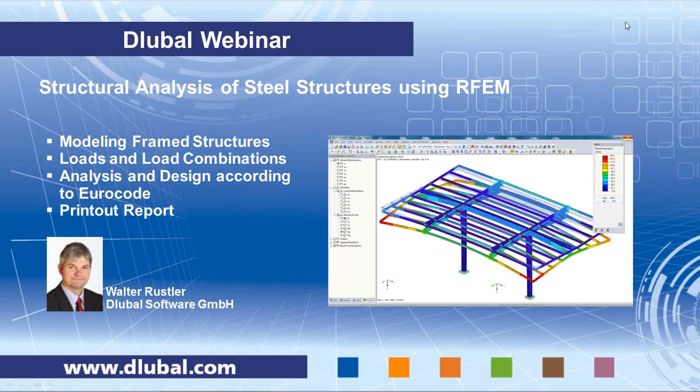Before we start with the live demonstration, I would like to point out the workflow inside RFEM and RF Steel EC3. These are the only modules we will take a look at today. So if you're looking for a Eurocode solution, those two programs are the ones that you need.

When designing according to a certain code, all the design parameters must be in alignment with the codes. It starts with specific materials, with specific parameters, with specific loads according to the code, with specific combinations to that code. Also, cross-section values can vary from code to code. And at the end, the code itself has several different design parameters.

Usually there are several options that you can use, and in case of the Eurocode, we have national annexes we have to take a look at. At the end, it makes your design flexible, and the goal is to have an economic and safe design. So it's vital to have access to all those variable parameters.

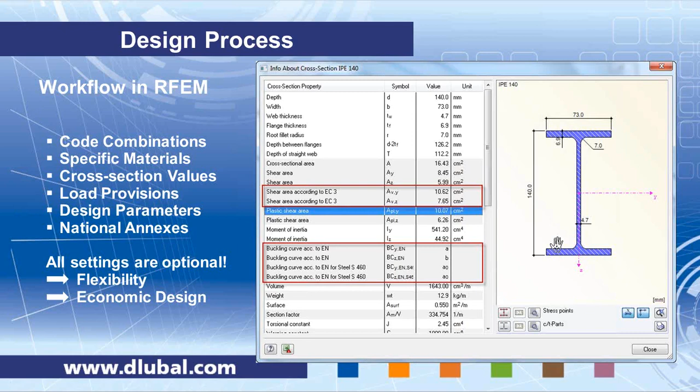When we talk about the cross-section, there are also special parameters in the cross-section library, for example, in case of Eurocode, shear area according to Eurocode, or buckling curves according to Eurocode. When choosing the design module for Eurocode, it will automatically use those parameters. Same is valid for other design codes that we are using.

When we talk about loading, it's clear that different codes and different provisions have different loading patterns and different wind and snow loads, for example. We have powerful generators inside RFEM for those types of loads.

In the design module itself, there are many options that we can set up how we do the design, which provisions we will use or not use. We also will take a look at those settings later. And in the case of Eurocode, there is a wide range of national parameters that are different from country to country.

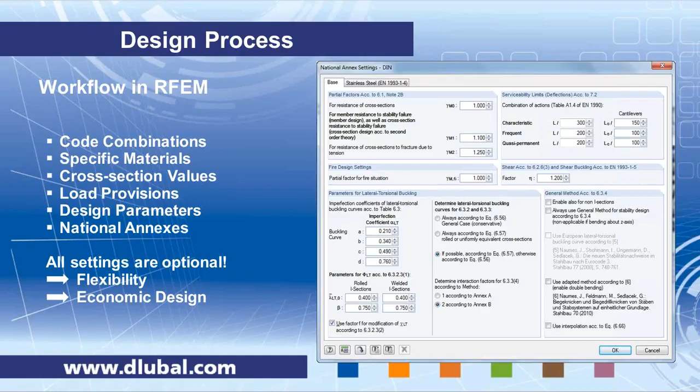The goal is really to have an economic and safe design, and we think it is very important that you can change those parameters and are flexible in the design process, because then you get really the best result and it makes your design very flexible and safe.

When we take a look at RF Steel EC3 in detail, it does a cross-section classification, so you can handle compact and slender cross-sections as well. And you can do an ultimate limit state design. You can check for your deflections and do a serviceability limit state design. You have a very powerful option to check against stability for buckling and lateral torsional buckling.

Additionally, you can do fire resistant design, and you can also use stainless steel in your design process.

Some special things about RF Steel EC3 are that we can, for example, choose between a member design and a set of member design. When we model a complex building or some structure with lateral intermediate supports, typically one part that would be built or constructed as one physical member is modeled as several analytical members. So one unity disintegrates into several different parts.

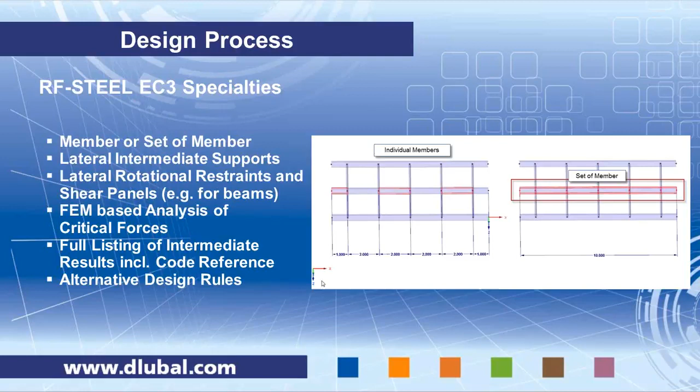When we think about buckling lengths, slenderness, loading, and also horizontal supports, it's clear that the length of a member is an important parameter for critical loads and critical moments, for example.

We also can handle lateral intermediate supports in a very simple way. You don't have to divide members when you want to put a lateral support, for example, with a nodal support there. You can just assign the distance of the lateral intermediate supports in the design module, and when we talk about critical loads, effective lengths, the software will take care of it, and it knows that there are those supports.

A very important feature is the lateral rotational restraints and shear panels. For example, if you have a moment frame for a steel hall and you can take into account the diaphragm that is stabilizing the I-beam against rotation, you can reach much higher critical bending moments, and therefore you get higher critical values and a better design ratio for your stability design. This is vital in those cases. If you don't have this, the chances that you have to use a larger cross-section are very high.

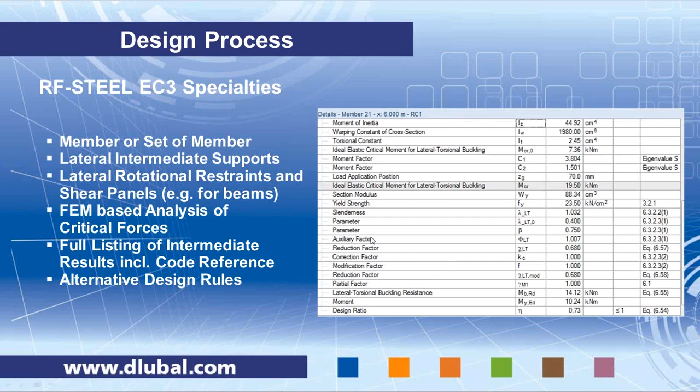Inside RF Steel EC3, we already have built in some newer research results that may be used in the next edition of the Eurocode. There are some limitations in the general method of EC3, and for example, you cannot use this general method for double bending, which is quite often needed during the design process. We have already included those provisions, published in recognized magazines, in RF Steel EC3, so you can already now use what may be the future code solution.

Once you have understood how we do the design process in Eurocode, you will be able to apply this knowledge also for AISC, ISGB (the Chinese code), British standard, Australian code, Swiss code, and Mexican design codes. Everything follows the same red line, everything follows the same design principles, and once you know one module, you most likely can work with the other modules because everything is tailored the same way.

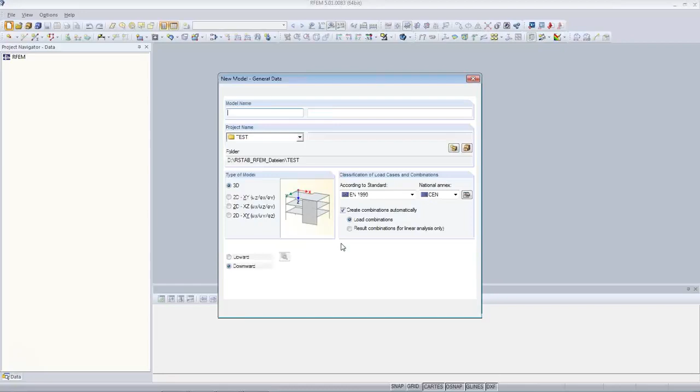I have already RFEM open, and when you open RFEM the first time, typically you get the new model general data dialog. Here I enter the model name, and I can enter here model of gas station. It can be also some kind of project number, whatever you want to use. In this dialog, we have the setting that we can choose create combinations automatically, and then we have to choose a code.

We have several codes in here, and all the design codes also come with this automatic setting, or choice of code, for the automatic generation of load combinations. We'll choose Eurocode in this case, and since we have an international audience today, I don't want to prefer any country.

So I stay with the general European Union default settings for the national annexes. I can view those settings referring to the combinations, and you find here exactly the words as they are in the code and the default parameters. If you want to change it, you can create a copy of this standard and apply your own factors.

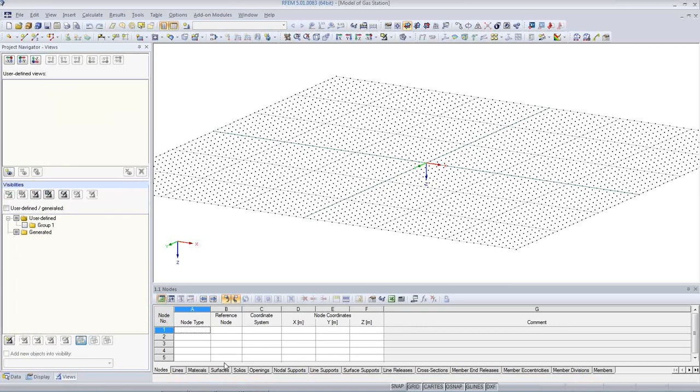When I press OK, there will be a new workspace that opens. I have my set of navigators at the left - data, display, and views. Later there will be results. I have my tables here on the bottom that I can use for input, and I have my graphical workspace.

Before we start, I'd like to enter a few cross sections for this presentation. For the steel posts, I'd like to use a wide flange I-beam, an I cross section, and I'll choose a HEB 300 at the beginning. My material is already set up to steel, and I can show you also here the library.

Here you have the filters, first for the material and then for the standard groups that are available. In any case, it's also possible to have a favorite group where you can just set up your own choice of materials.

On OK, the cross-section is put into my file. Next, the cross-section for the cantilevering primary structure of the roof will be an IPE 400, also made from steel. The third cross-section will be for the purlins, which is again an IPE cross-section size.

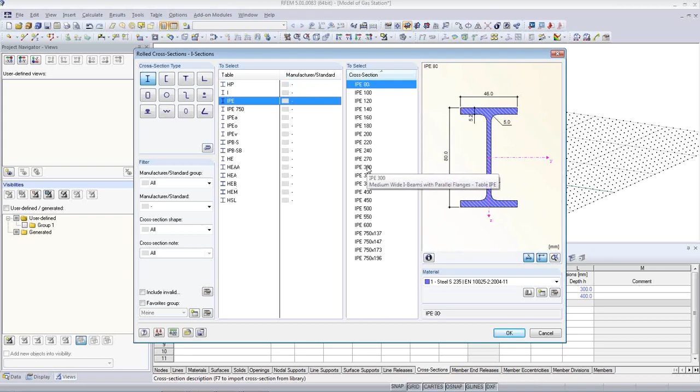Let's start with a 300. And I have another cross-section I'd like to use for the edge of the roof, which will be a channel section size 200. Everything made from steel.

Okay, I do this - you don't have to do it that way. I do it because then later on I can just select those cross sections easily when I set my members.

To set the members, I work with my grid, which is set up to 1 meter spacing. You are not bound to that grid - you can change to any coordinate if you want to. It just helps me to model it very quickly. There are other ways also to import structures from CAD applications.

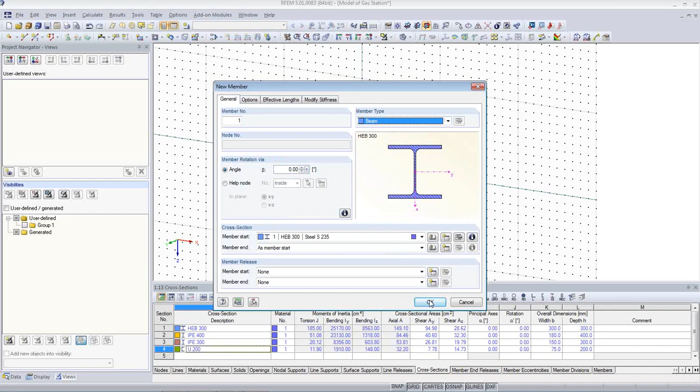We can use background layers that we can snap to, and different ways. But I'll do a free modeling today, and I start with my first column, which will be an HEB 300. Member type is beam, and I'll just click OK.

I start from 3 meters from the origin, and the length and height should be 5 meters in the vertical direction. My first post is there. I see it's not oriented the right way, so I rotate it by 90 degrees.

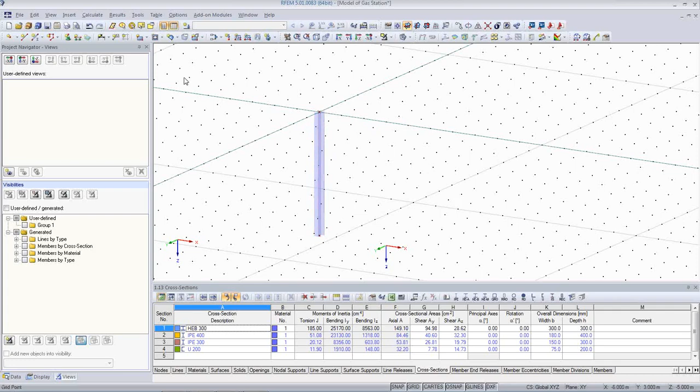Now I want to model the cantilevers, so I'll put the origin of the grid on top of the column, use the horizontal grid outline, and enter my next member. Here I can simply select from my choice of cross sections that I've done before. So the length should be 4 meters. If I hover over the section, I see the length at the popping-up bubble at the end.

Same thing on the other side. I do again the same procedure, and I have here my first T of my roof. I'll put in another support here - I'll use a nodal support, which should be rigid or fixed in this case.

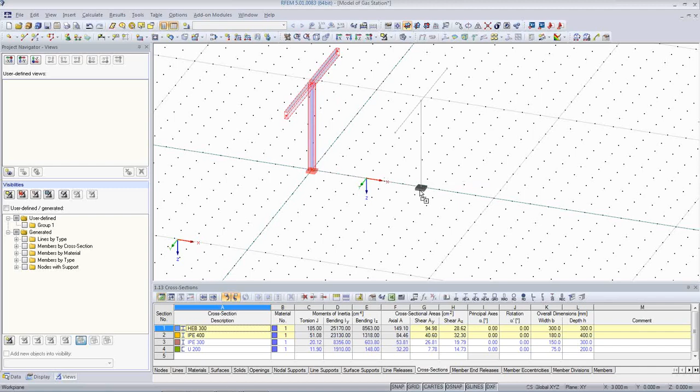Next, I'll make a copy of this T to the other side. I can move my origin of the grid again to the bottom. I hover over the selection, press the left mouse key and the control key, and create a copy at a distance of 6 meters. Sorry, I didn't press the control key - select, control, wait a little bit, copy, 1, 2, 3, and here we have a copy.

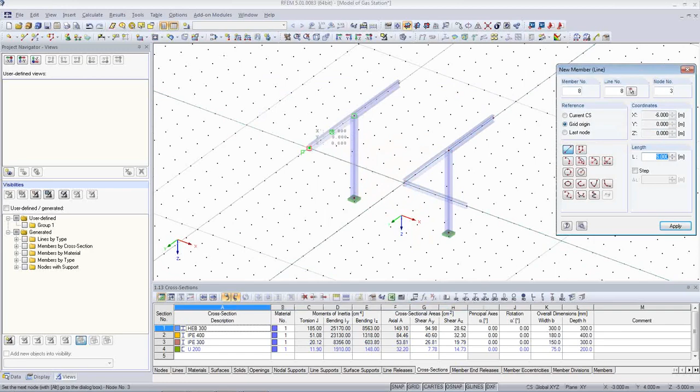Okay, quickly I will proceed in modeling the purlins. I start from right to left, new member, new cross section, and we start from here to here, from here to here, and from here to here. So there are 3 members.

I select them and create quickly 8 copies with a displacement vector from here to here, -1 meters. On OK, everything will be copied. So we quickly created this grid type for the purlins.

At the edge, I will put another cross section. This time I'll use a channel, and I'll enter it from both end nodes.

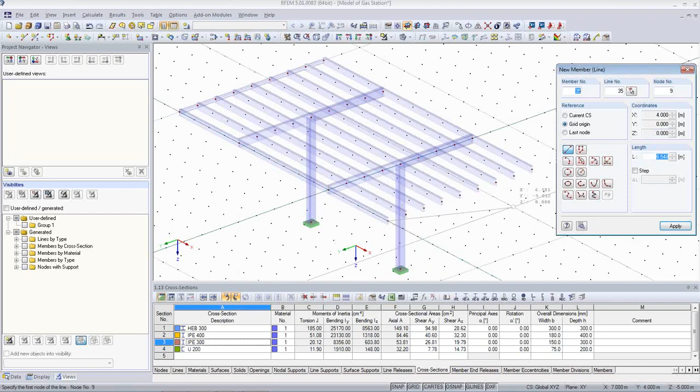We'll check the rotation, and we'll notice that we have to rotate this last channel by 180 degrees.

Okay, now we are basically done with the main model. What is missing is some releases. Everything is now rigidly connected.

Even here, where I have no intermediate division of the cantilever beams with the purlins, it will still be possible to analyze it, because RFEM automatically realizes there is a node on the center line of this primary steel structure that we want to connect.

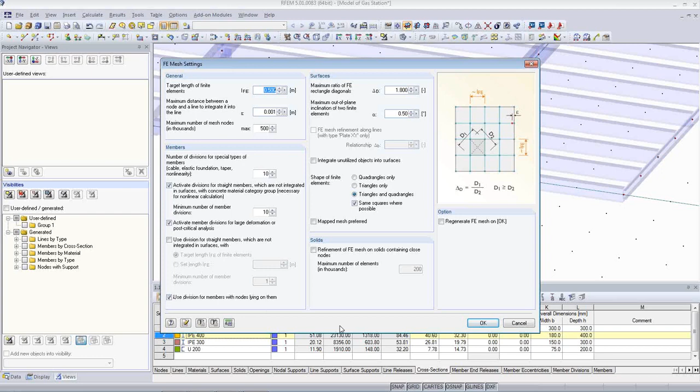You can set this up in the calculation FE mesh settings, and here is a check where we can use this division of members that is done in the background. Here's the setting. Same is valid for the edge beams here with the channels.

Okay, we'll quickly check whether we have the right cross section. I can go to the table and flip through the lines, and we'll see there is a highlighting of the selection. When I select it in the table, it will be highlighted in the graphical work window. If I don't want to see those tables, I can hide them.

Okay, I said we were going to enter some more releases. I'll create in my data tree a new release. Everything I've done is also inside the data tree, and I can create a new member release or line releases and so on. There are different values, different ways how to do this.

Member end releases, right mouse click, new member end release. I want to have the situation that these purlins will cross the primary steel structure but transfer no moments. So it will really be a crossing of two beams, and they act like a scissor. That's why it's called scissor type.

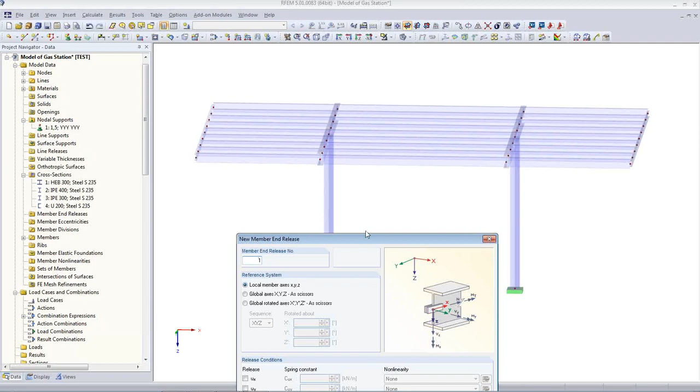So to have a scissor type release, I'll choose a global release as scissors, and the scissors will be about the global y-axis and z-axis. Moments, which would be torsional moments, should be transferred to the primary steel structure. I need this setting so I don't have a kinematic system.

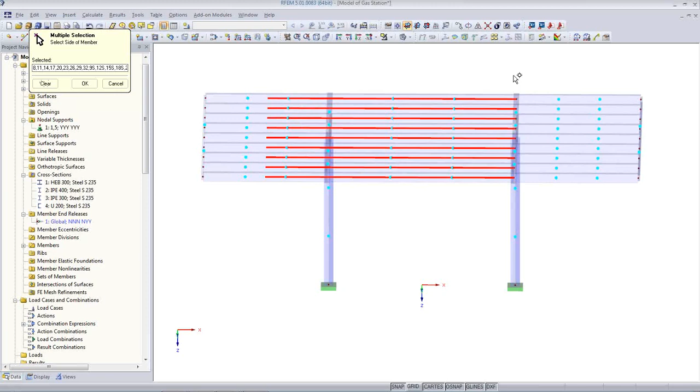Once I have this release defined, I can assign it graphically to the members. If I want it on both sides, I select the center part. If I want it on just one side, I can select that side, either individually or with a window. But you have to make sure you don't select everything else, which is wrong.

And I did this wrong here, so I have to deselect it again. Okay, one more time. Once, and then we'll do this here. Well, you see it's a live demonstration, and not everything always goes the way you want it, but I hope you understand how these things work.

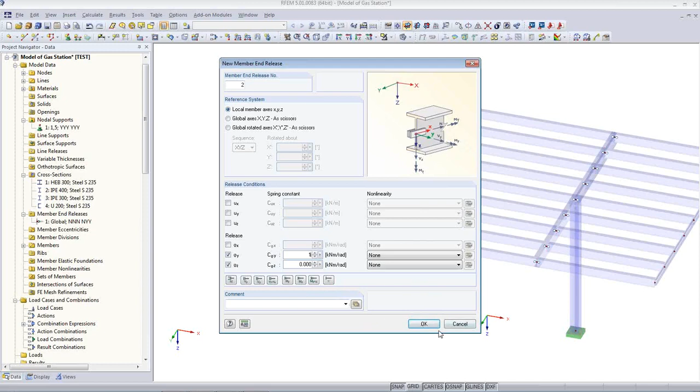Okay, here we go. Now we have the scissor type on both beams, and at the end I want to have a regular release, so I create a new member end release, and this time it's a local one. Because I want to hinder the channel from rotating about its own axis, I put here a small spring around the local phi y-axis.

You see here the coordinate system, and now I can do the following: when I hover over it, there's a little arrow, so the end is on the outside here. I select those members, double click on it, and releases at member end is the local one. Here it's the member beginning, double click, and there is also the local one. So within a few mouse clicks we have assigned those releases.

We can save during the work with the software, and next we'll be working with the loading. I'll show my tables again, and display the load cases combination tables. I start with entering the load cases. This time I have 6 load cases.

First one will be self-weight. It automatically finds that it is a permanent action, and it automatically knows we most likely want to have the self-weight of the model structure activated. Next will be snow, which is snow load, with no self-weight activated. Then we have 2 wind load situations, one in plus X and one in minus Y.

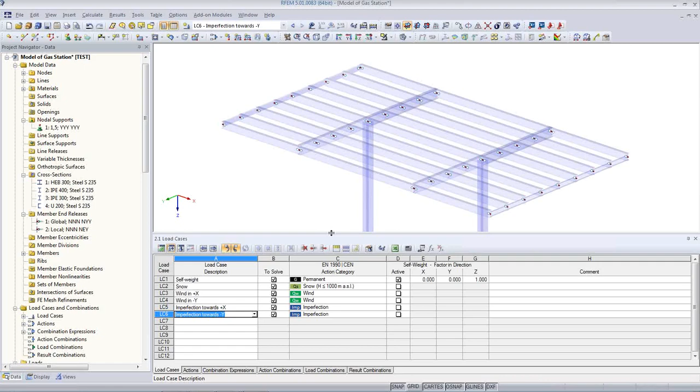And we have also the imperfection in X direction towards X and the imperfection towards minus Y. So there are two imperfection load cases that I want to apply, because if I do a second order analysis including imperfections, I will not have to deal with buckling lengths and critical lengths inside the steel EC3 module. There is a provision in Eurocode that in this case the regular length, which I modeled here, is used as the buckling length and can be used as the buckling length.

Okay, I have actions, so I have two wind loads which are automatically recognized as alternative. So wind in one direction cannot be at the same time with wind in the other direction. So we have now three actions basically, and the combinations, the design situations I want to take into account are the ultimate limit design and the serviceability limit design situation. In this case, I only want to do the characteristic design situation because it is the one that is controlling in that case. And if you're not sure, you can do all the combinations, of course.

And I also want to consider imperfections. When I check this consideration of imperfections, I'll have several other options. For example, I want to avoid that there are load cases or combinations with and without imperfection. I always want to apply imperfection. And I also want to avoid that there are imperfections in both directions at one column, for example. So those two checks have to be set if I want to do this.

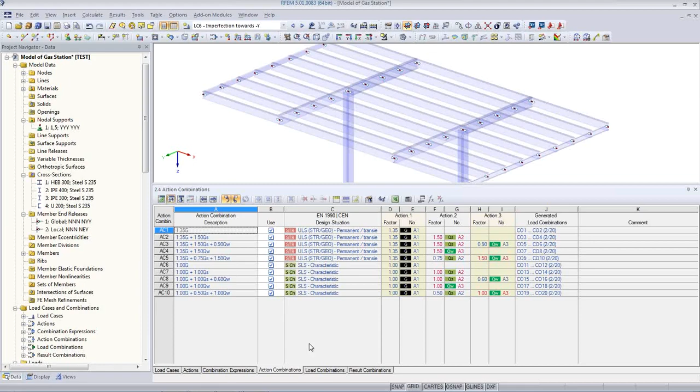Once I have set this, I go to the next table, action combinations. So now it will show me the combination string or the combination criterion based on actions. So there's only wind with factor 1.5, and it includes load case 3 and 4. This is a more simplified representation of the combinations, and the real combinations are then in the next table, where you can see that we have now 10 ultimate limit state combinations with factors, and we have also 10 serviceability limit state combinations with the corresponding factors. Every time I change something, RFEM will update all those combinations because I checked automatic generation.

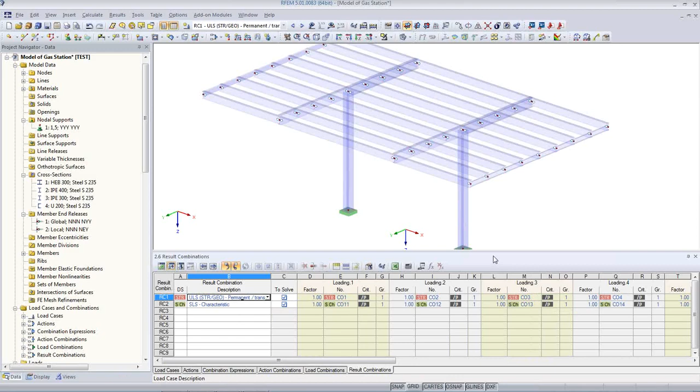In the result combinations, I get the envelope result of all ultimate limit state or serviceability limit state combinations. Okay, next we'll have to enter some loads, and I'll have to speed up a little bit so we get ready within the right time.

I'll change the view to the wireframe view, and while I do this, I noticed I have made a small mistake here. I see there is also a release here. To avoid any complications, I'll just set this to none and change it. So now everything should be fine.

I'll set up the first load case, and we'll create a member load via area load of size 0.5 kilonewton per square meter. I have to assign the impact area of that load. Okay, okay, okay again, and I'll see here the first load case. Second load case will be snow.

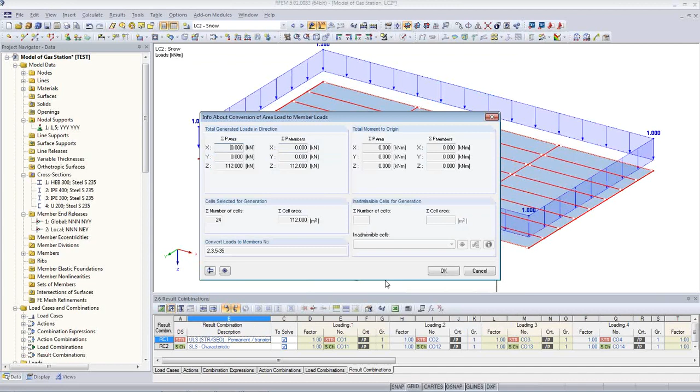I can just leave it as this, but in case the roof would not be horizontal, you could set up different projection patterns and so on. And the snow load should be 1 kilonewton per square meter. It remembers the setup of the boundary for the area. I just need to change the load size, magnitude, and I get this second load case.

Third load case will be wind in X direction. Before I do this, I have to do something else I want to point out. This time I will have a pressure load on the left side of the roof and an uplift load on the right side of the roof. So I will have to apply the load only on part of these members. In order to be able to do this, I can create some helping nodes, which I will do now, which will be in the center of those boundary members.

Now I can use those nodes to define my area for the area load. So the compression should be 0.1 kilonewton per square meter, and I can snap to this center point. Here we go. Okay. Okay.

If I want to show the real load pattern, I can show it, and you see it ends here at the center, and it's distributed trapezoidal where several members intersect. On the other side, I will do an uplift, so there is minus 0.25.

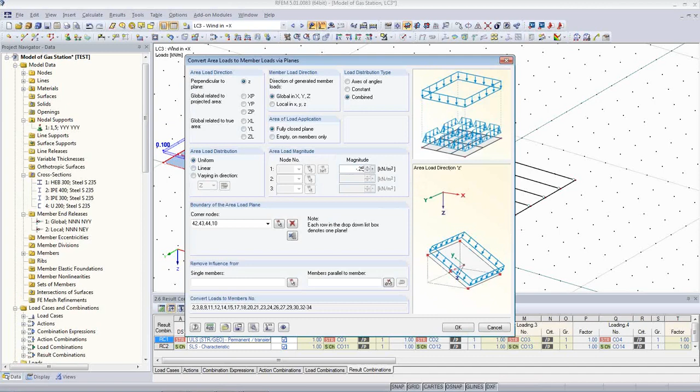I'll delete the impact area and set it up new. First wind load case. Next wind load case, wind from minus Y. Same thing again.

I start with the uplift load this time, and I don't need the helping node in this case. And one more time, the other half of the roof.

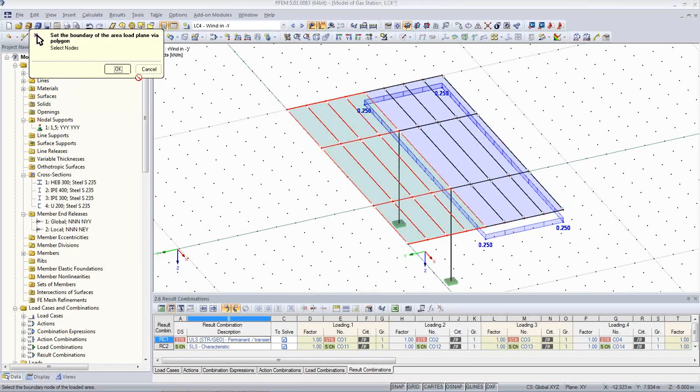Here we go. Last two load cases are the imperfections.

I'll be able to display the local axis of the members. In the display tree here, you have all those settings, and you can see the local axis. Also in the view tree, you can show only certain members, for example only the columns, and then I have only those members active that I want to work with.

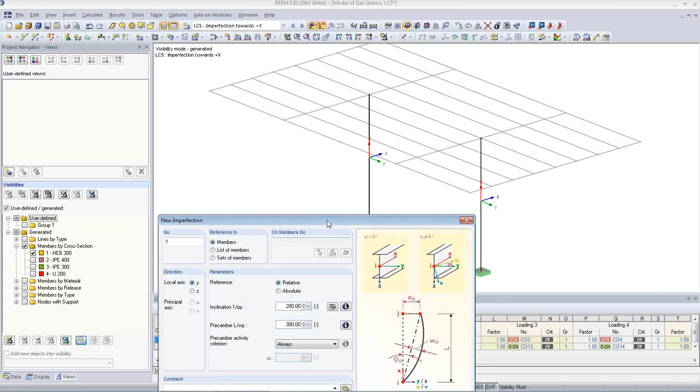This time I will apply an imperfection towards X, a new imperfection. I can apply them according to local axis, which is why I showed the local axis. This time I will have to have the local axis Y, which is taken into account. I want to have the inclination in positive direction and the precambering into negative direction.

I can choose here the values for the imperfection. I'll even have the option to use some formulas from Eurocode to take several columns into consideration and so on, but you are able to enter it freely yourself. So those values are kind of on the safe side. I'll work with those at the moment.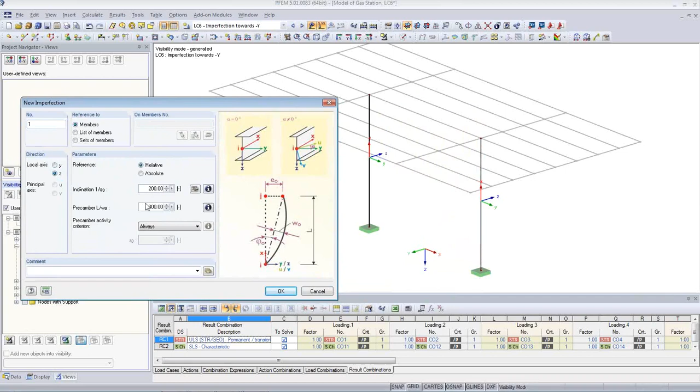Okay, and then I'll just enter it just like any other load. Next load case will be in the other direction. This time it should be in local axis Z, and pre-cambering should be also this way. So here we go.

Now we are done with entering our model and the loads, and we can proceed with the analysis. I can run the analysis and say calculate all.

We'll do a second order analysis of the load combinations. By default, you can of course use a first order analysis or a large deflection analysis. Everything can be set up in the calculation parameters.

In the little displacement diagram here, you see how the iteration process is done, whether there are maybe situations where the software doesn't converge, where there is no converging result.

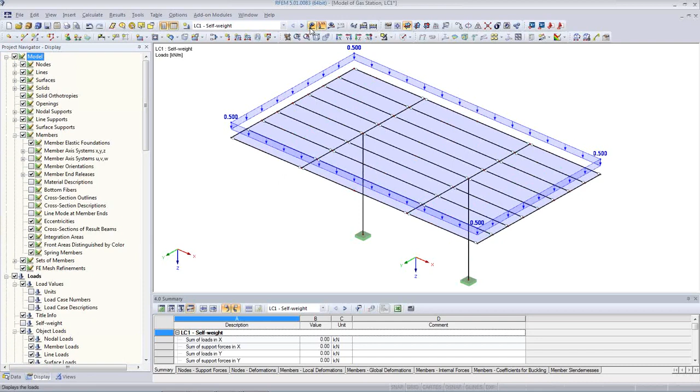Once we are done with our analysis, I can go back and switch off my member axis system, and I don't want to see the loads, but I want to see the deformations. Everything seems to be, this is now self-weight, symmetrical, so I think we did everything okay.

Let's check the bending moment quickly, see what happens here. My, Mz, here we go. And we see here we have a typical bending moment diagram. We see here also where we have the scissors force releases, that there is a bending moment, and there is no torsion involved in this main principal axis, principal steel structure.

So it's really a scissor type hinge. We have a minor, very small torsional moment due to this connection here, which we can really neglect. And it seems to be symmetrical, so everything seems to be all right. We have axial forces, so everything seems to be reasonable.

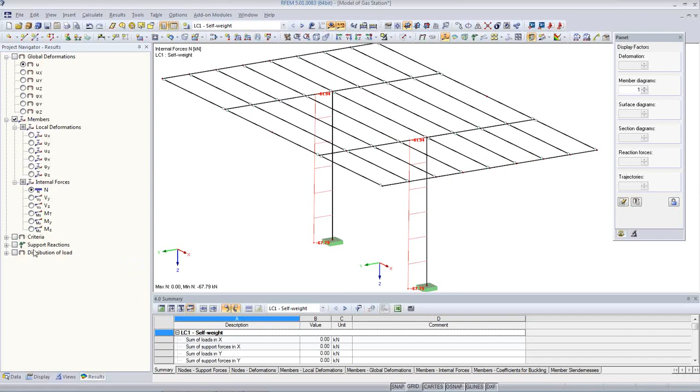We can navigate through all the combinations and do the same thing here. Maybe go back to the bending moment, which is maybe the most interesting part. Sometimes we should also have some bending in the weak axis and so on.

Next will be design. We start by going to the data navigator, and we'll take a look at the design modules. Now everything we saw here was plain pure RFEM.

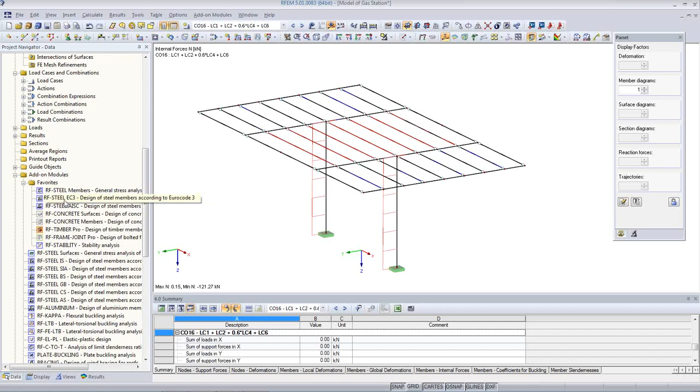When we talk about steel Eurocode design, we need the module RF Steel EC3. We open it by double clicking on it, and now we'll have everything that we have in RFEM available in this module, since all members are also modeled with the basically design lengths or effective lengths that we will use.

I can check here all members for design, so it will load all members for design in here. I also want to do a design for the ultimate limit state, so I can use the result combination, which is the envelope selected for design. Again, I use the national annex or the default parameters for the national annex.

Serviceability limit design and fire resistant design. I will talk about serviceability limit design later. Fire resistant design we leave out for the moment.

We go to the next table, materials, and we see our material parameters. Note that you have different yield strengths for the different thickness of the local parts of the cross section. So it's also very important to take this into consideration.

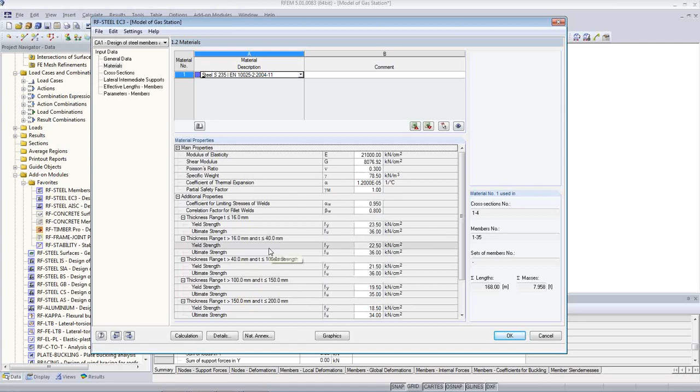Cross sections. We see the list of cross sections. I can do an optimization. I can choose from current row, which will choose the most fitting HEB section, the best fitting IPE section, and again the best fitting IPE section.

And I can do this also for the channel section. I have all the parameters here. I see, for example, I have a shear area which is according to Eurocode, and I see the chapter of the Eurocode here.

Lateral intermediate supports, we leave them out for now. Effective lengths, you can enter critical values, buckling lengths, and you have the option to take into account warping when you talk about lateral torsional and torsional flexural buckling. So here you have options to consider warping, restraint on one end, on the other end, partially, and so on.

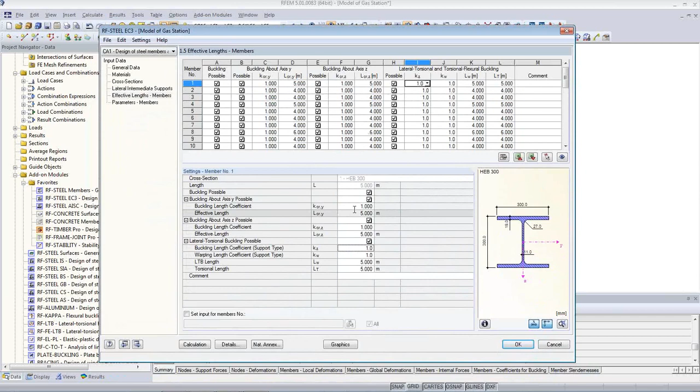Since I modeled it with system length equals design length, I don't have to do anything here. You also have the option to load some default typical settings which are known from the literature, or you can also import values from the additional module RF Stability, which allows you to analyze a critical load or buckling length.

The parameters for members allow you to take into account shear panels and rotational restraints, especially, for example, from a steel deck. Also for tension forces, you can reduce the cross-sectional area to a net area, for example, take into account bolts.

Okay, we take a look at the details, which are common for all national annexes. We have here several registers where we can change different settings. I'd like to point out the stability settings.

Here we have the option automatically by eigenvalue method determination of elastic critical moment for LTB, lateral torsional buckling. So this is the very powerful numerical solver that sits behind each member when we do the analysis. You can choose here, for example, whether you want to use the general method or the equivalent member method for the sets of members. We might have to take a look at it later.

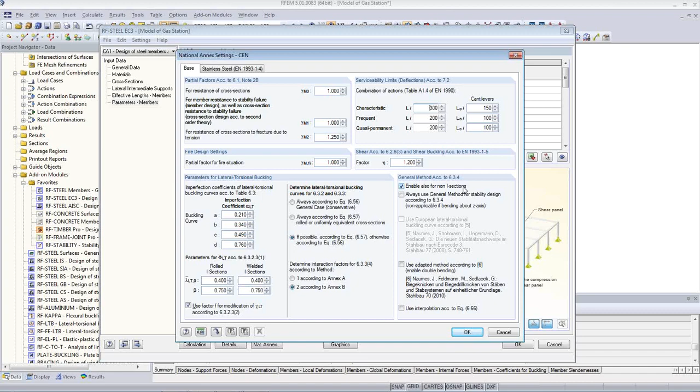Then we have the interaction factors that are chosen automatically according to a certain method. Some sections are of type I, but maybe there's just a little plate welded on one flange, and then in general you could say it's not an I section anymore, but we still want to treat it like an I section. So we have a check here to allow this, for example.

And also you have the options for the national parameters for stainless steel. Okay, we run the analysis. We get now the optimized results.

In RFEM 5, RF Steel EC3 was increased in speed. It's much faster now than it used to be in previous versions. We have here now optimum result of 99%. We see here design by load case, and we see here the highest design ratio is at member 20 at location 6 meters.

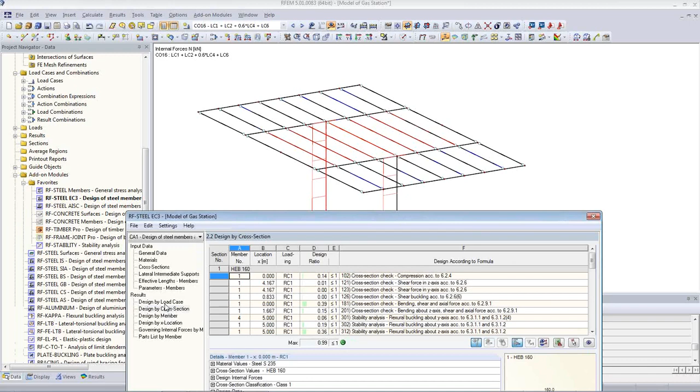If I pull it down, I should be able to see where it is. Maybe we'll go back to here.

I'm not sure, but maybe there is a problem with the software where the audience does not hear me anymore. I don't know what happened. It seems to be all right. My colleague just signals me it's fine. I'm sorry for these problems. I hope it will be okay in the recording, and I hope it's okay.

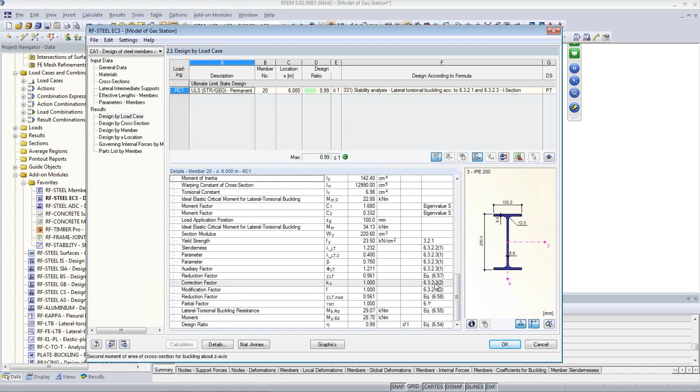So we see here all the design details from the material values, from the cross-sectional values, from the design internal forces. We see here also the classification of the cross-section. This time we have class 1. And we see here all the intermediate values. We have here the reference to the tables in the code, and you can check it in detail if you want to. We go on with the design ratio, all the input parameters, and down the line at the bottom you have the design ratio, the final design ratio.

Everything is commented with the reference to the codes. If we have design by cross-section, we'll see also which check is controlling and which checks are done. We see here the stability analysis, for example, flexural buckling about the z-axis. We can also check the details here, and we can do the same sorted by members.

If I'm not sure where the result is, let's go to the graphics. I want to return to RF-STEEL EC3. Start it. So when I'm not sure where it is, you can navigate through your result table and you will see, for example, I want to know this member here. You will see where we are. It's section number 3, member number 20, member number 21. You see where the design results are from.

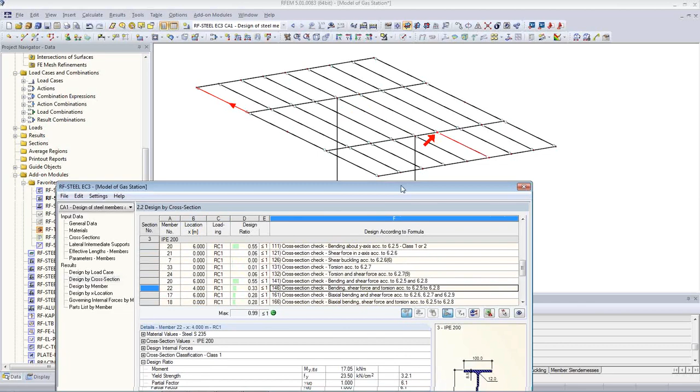Okay, you can check this also graphically. If I want to look at the results, I get my result panel here, and I have a nice graphical representation of the results. I can change the view, the display of the results here in the display navigator and check here cross sections, for example. Now we see exactly where we have the highest design ratio. Or you can do it without diagram, then you write here the numbers, which is a nice way to make a documentation.

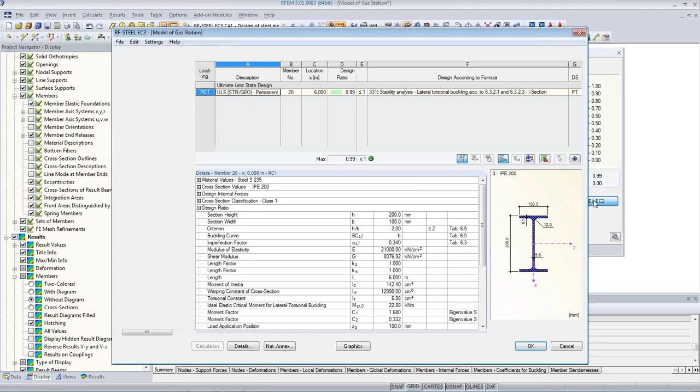I'll go back to RF-STEEL EC3 because I want to see which cross sections have been used now. So we see here, we have here, originally we had a 300, now we have 160. Here we have a 360, here we have a 200, and we have a channel 160.

We do a nonlinear analysis, so stiffness has an effect. Now we have analyzed the internal forces with different cross sections, but I have to update them to get the real effect of the nonlinearity and to get maybe effect of different self-weight and so on. So I export all cross section to RFEM and do another design round. I run the calculation, and inside the module automatically the needed results are calculated.

There can be now instability because we have a nonlinear problem. In this case, I think it's quite okay. We analyzed the cross-section, the optimized cross-section linearly, but we did a nonlinear analysis, so there are some things that are not quite linear. So here we have maybe to do another design round.

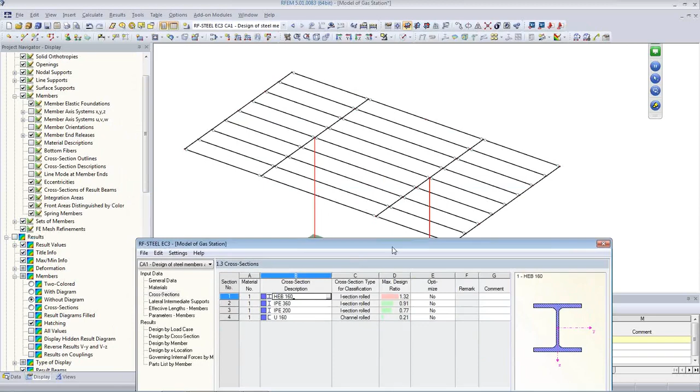I have not taken care of the serviceability and the deflections. So therefore, and I know in these cases we have a problem with deflections, because the columns, if they are weak, the whole roof will kind of wiggle back and forth. So I have to optimize one more time this cross section, and most likely I have to even choose a higher, also controlling is the serviceability, and for this probably I have to use even a bigger cross section. And I have done this before, this analysis, and I know I will have to use something like, or we can check it maybe.

I enable now the serviceability limit state, and I use my characteristic combination. When I do serviceability, there are additional parameters that have to be set.

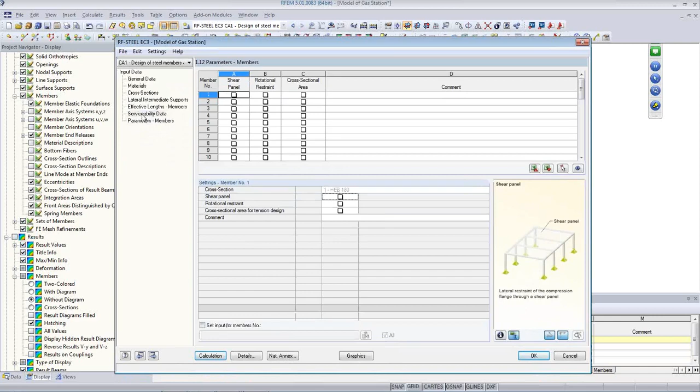Let's run it, and the program will set the serviceability data, I have to set which members I want to check. I say members, and I choose my 4 cantilevers from the primary structure, and maybe I choose one of these edge structures, edge members. I can use all of them.

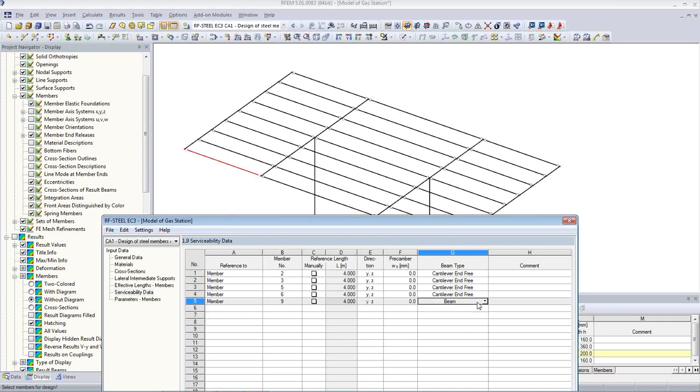I'll just like to point out what's possible here. My 4 cantilevers are of type cantilever, and I modeled them from the inside out, so I want to know the deflection at the free end. So I check here free end. And from the other members, 1, 2, 3, 4, and from the other member, this one, I modeled it from right to left. I'll also use the free end at the end.

So it's a difference if you have a cantilever situation or whether you have a beam situation where the maximum deflection will be maybe in between the 2 nodes, and in the cantilever problem it will be at one end. Okay, and we run the analysis again.

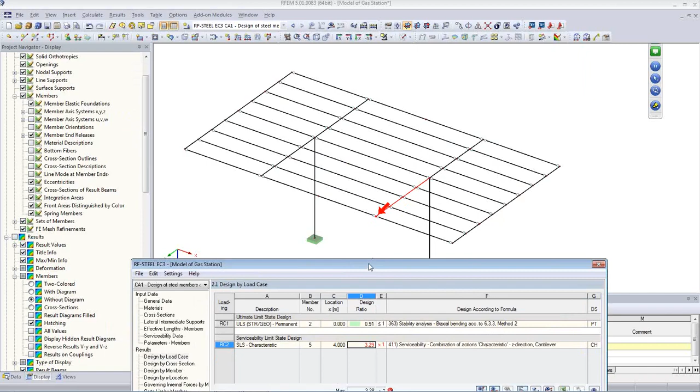So now we need to analyze the other combinations which I didn't run before with the newer cross sections. And then we do the analysis of deflection, and we'll see already, which I kind of knew already, that we have a problem with serviceability, especially here. And this is due to the weak stiffness of the main posts. From the ultimate limit state view, it would be okay.

To make it a little bit faster, I'll choose here now a little bit bigger cross section, HEB 240, and also if I make the cantilevers a little bit stiffer, it also will help. So I use 400 here. You have the option to set up whatever you want here, you don't have to take what the software provides for you. I export all those changes, and I run the analysis one more time, and then I should have the correct result.

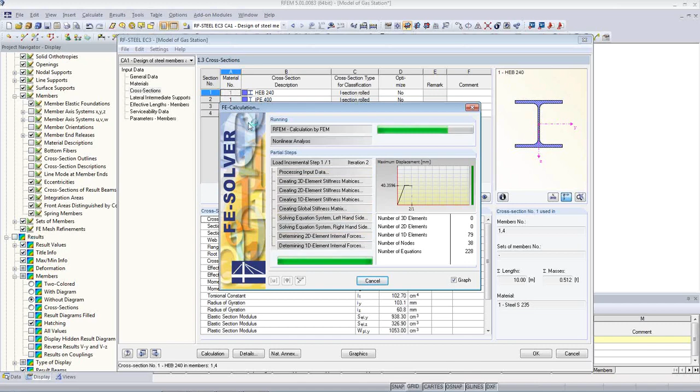At the end, I'd like to take a look at the printout report and show you how to do a short documentation of the results. Okay, we have a little bit of a problem here yet, at this end. Don't worry about it, it's only like 8%, so let's not consider this little extra deflection here.

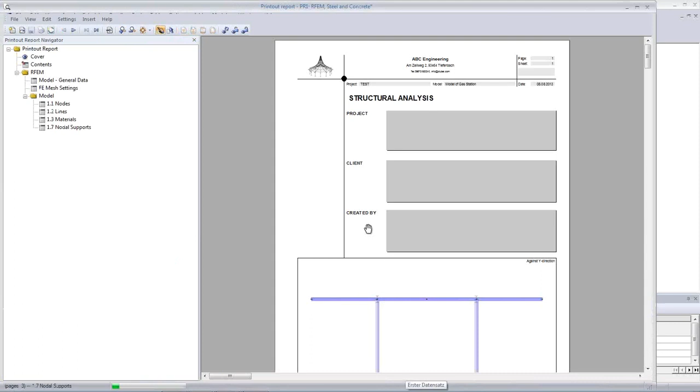Okay, I'd like to do some documentation in the printout report. How to do this? First of all, I'll open a new printout report, again in the Data Navigator. I can select from a template I've already provided inside RFEM, and I click OK. When I do this, the printout report opens, and I get a preview of all the chapters in the left navigation tree, and I get a nice preview on the right.

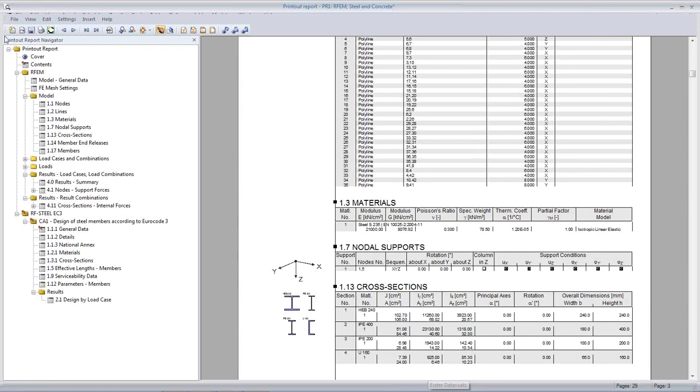So I can just scroll through all my results and I can zoom in and see all the tables, how the results are presented. Next, I close the printout report and I'll print in some graphics. So I had this nice graphic here from Steel EC3.

Maybe I like this. Here is my updated view with my maximum design ratio of 74%. I don't like the colors, I can change it. I can go here, 74% yellow is not so nice. Maybe I just want to change this to orange and this one also to orange. You can set it up as you like, so between 50 and 80% we have one color. I can give it a name, my colors, and I'll have a better color, for example. Okay, this is a nice picture.

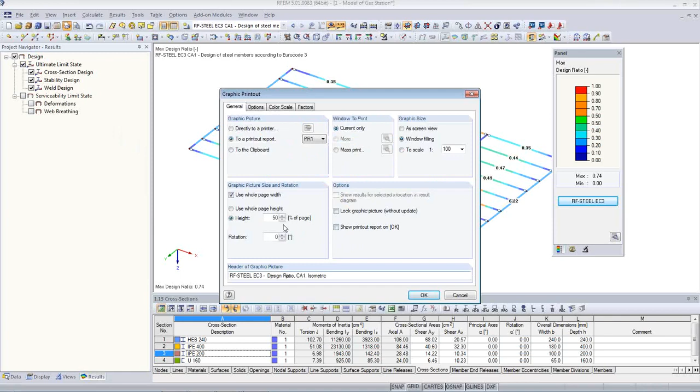I'll print it to the printout report. I don't want to show the printout report header. I will use 50% of the page. Okay, it's sent to the printout report, I'm done.

Maybe I only want to see the results for the cross-section design. I'll do the same thing here. Or maybe for the stability design, so you see exactly what is the problem. Or maybe I want to do the deformation design, so you see, okay, here we have a little problem at the edge. Print that as well, or you want to have everything.

Next, I'll do similar things with my internal forces, I will have to document them as well. I go to a two-color display. I select maybe one combination, maybe I want to see the bending moments. Okay, something like this, a little bit higher diagram. Looks great. Now I print everything of this.

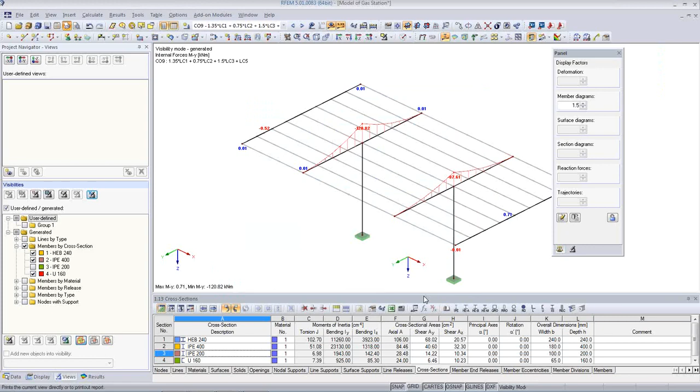Oh, maybe I don't like the numbers here. I can go to the views and say only my columns and my main girders, maybe the boundary. Okay, looks good. Print. I do a mass print this time, meaning I can print this view that I have here of selected or all load combinations. I want to use the ultimate limit state, of the internal forces, all 6 of them, of the actual view. And it will automatically process those graphics in the back.

Next, I'll do the purlins alone. Something like this, looks good as well. Print, same thing again, mass print, results, selected, ultimate limit state.

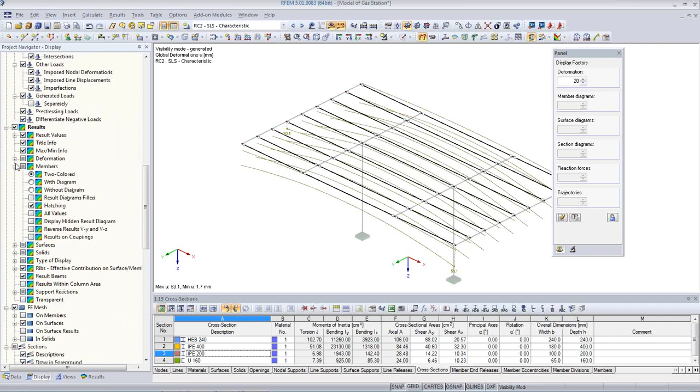And one last combination, maybe the characteristic results, and I want to see here the deformations. I would like to do one which has a little bit more impression, a little bit more impressive view. Deformation, members, cross-section colored. Looks nice. Maybe I want to have all the results here. Something like this. Print, window filling, exactly this picture.

One last picture maybe yet is with some dimensions. I can quickly put here some dimension lines. Maybe I want to dimension also the distance of the foot points, the height and also the length of the width of the roof. Maybe I'll change this a little bit so I have no overlapping.

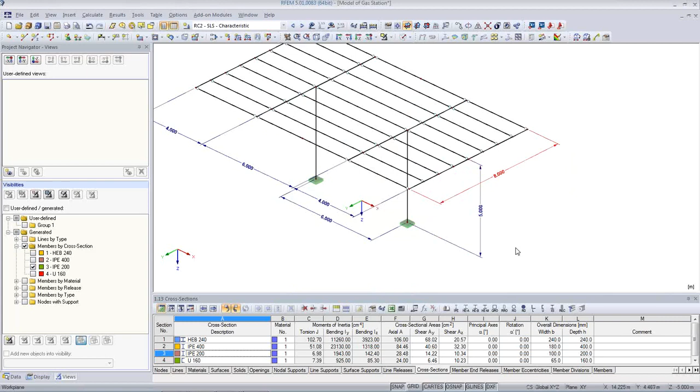Something like this. Okay, here I want to use the rendered view, and I print this view to the printout report.

Now I'm done, and I want to show the printout report. It will take some time to load because we've created an immense amount of graphics, so it has to update and read all those results. We don't want to do this all the time, so we take some time and not open the protocol unnecessarily.

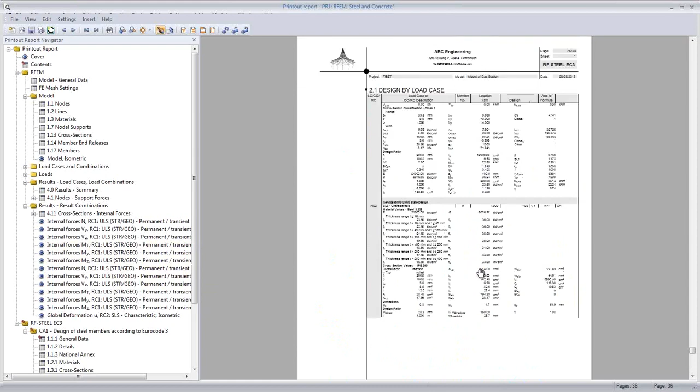But now we see already the result. We have here the steel design results, the individual graphics that we did. We had results by load case, by members, member parameters, everything is here. We have a total of 38 pages, which is quite reasonable, and here the parameters of the national annex that we can look at.

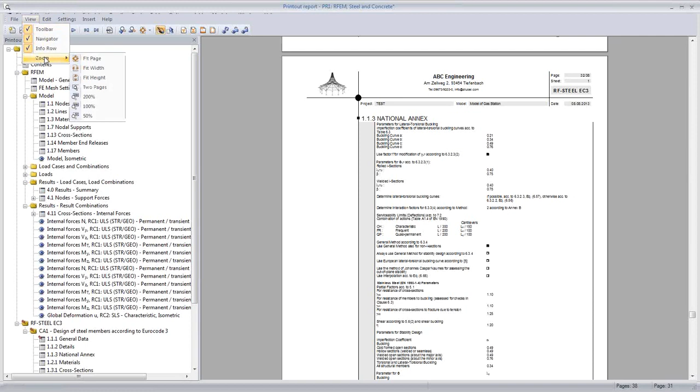We can also go to view, fit to page, fit 100%, or fit zoom, fit to page, one page. We can take a look at our internal forces.

Maybe I want this picture to start on a new page, so we'll update everything and move everything, and we'll have a new page starting with this picture. So it starts on the next page, and now we have two images all the time on one page. It's nice, and automatically all the graphics are here.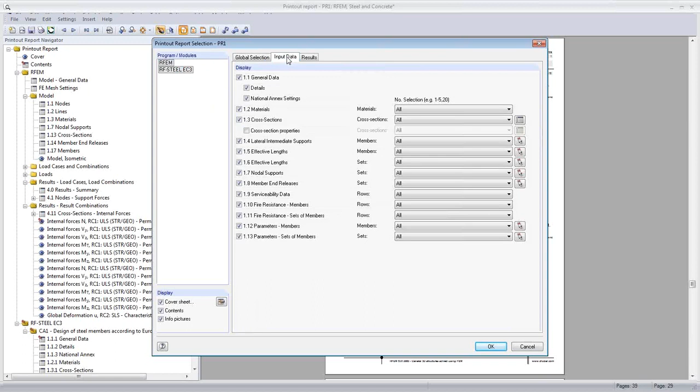You have various filter options in the printout report according to your modules, and you can filter what you want to have here. Maybe you don't want the fire resistance input data because we don't do it, so we can deselect it and so on.

Also, the cover, I didn't like how it looked. I can edit it: go back into the printout report, change my view to the main program, disable the grid, and go back. It will automatically update the view in here.

Okay, once I'm done, I'll close the printout report. I can export it to a PDF if I want to, then exit the printout report and save it.

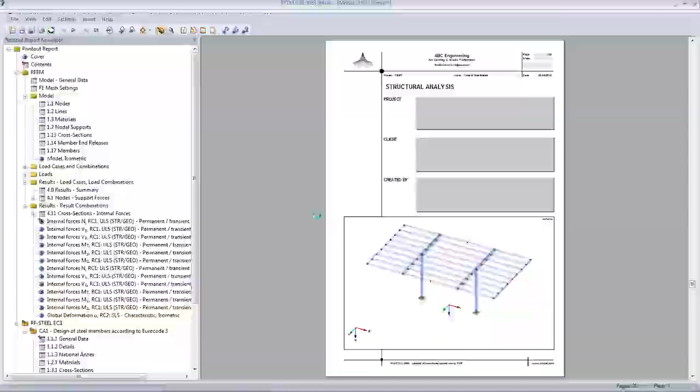Now I'm actually done with my live presentation, and I want to look at some questions that have been presented during the webinar. I'll take a look quickly at the questions and see what I can answer now.

One question was about set of member and supports in set of members, and also supports, intermediate supports. So let's go back to this example.

When I take this cantilever beam and want to take into account the intermediate support by the purlins here, I can edit it. I have to go to the module first. I open the module and edit the design parameters, the lateral intermediate support for this beam.

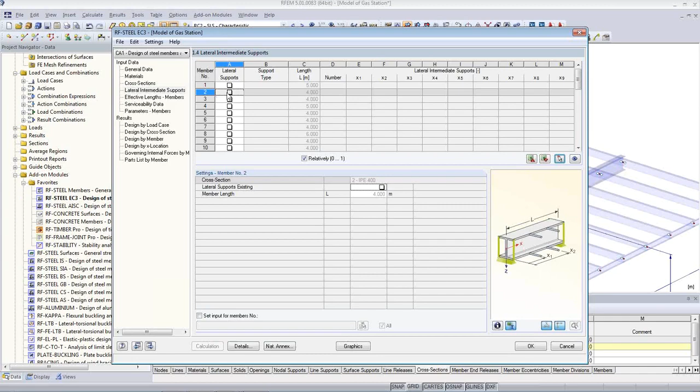I can select it, it's number 2. I say here is a lateral support. It puts here the option to have a fork support, but I have 1, 2, 3 intermediate supports, so I put here 3. So it's spaced evenly now.

If I want to, I can space it relatively or absolutely, and change these distances as I want. Okay, I have a fork support. I can choose whether I have a support on the upper or the lower flange, or I can say user defined and enter my own distance on which level of the depth of this section I want that support.

Let's have a fork support for this one, and then we will see the difference on the other side. So we run the analysis again.

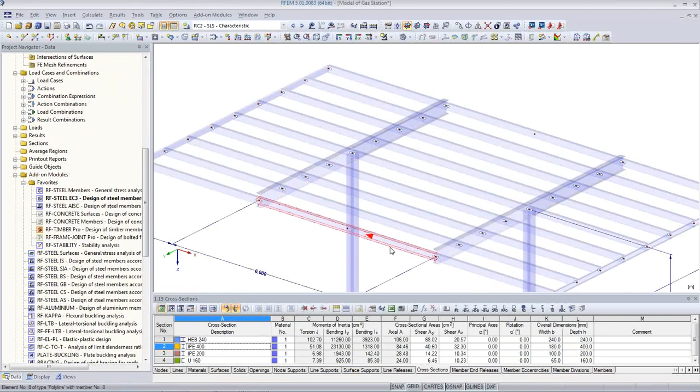We see here we have to look maybe at the design ratio of this member in comparison to the others. So I go to the graphic, select the results for steel EC3, and check stability - deformations maybe I don't need. This time I only view my IPE 400. Maybe I choose the wireframe so I can see everything.

So we have the same situation here. Everything is symmetric. We have 57%, and here we have 58 and 52. So we gained approximately 6% effectivity by having this fork support here.

If I go back to the steel module and check out the critical loads, cross-section by member, we pick this member and see here serviceability, stability analysis, lateral torsional buckling. M critical is 5,373. When I take a look at this other member, which is similar, we have lateral torsional buckling of only 422, so about more than 10 times less. So it makes a real big difference.

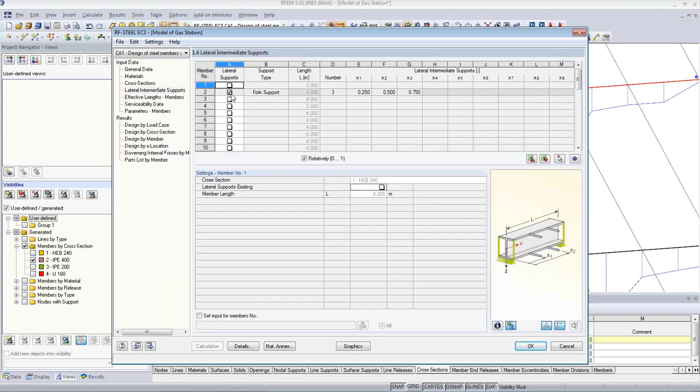I can maybe redo this and check again the result of the calculation of this member number 2. Let's pick it, this one.

Lateral torsional buckling. So now we're back to the example. It makes a real big difference whether you have an intermediate support or not. Very powerful feature. This time stability wasn't quite so dominant, but if you have stability as the controlling design situation, it will save you tremendously.

The next question is about the set of members and how that works. Let me show you this in another model.

I have a similar situation here with two models: one which is the intermediate beams, and one has the same model with the same loading using the set of member approach.

If we go to the design of steel EC3 and select this one, those six intermediate beams or divided beams, and the lateral set of member, we run the analysis with default settings. One thing I have to point out: when we have a set of member, we have other support conditions we can apply.

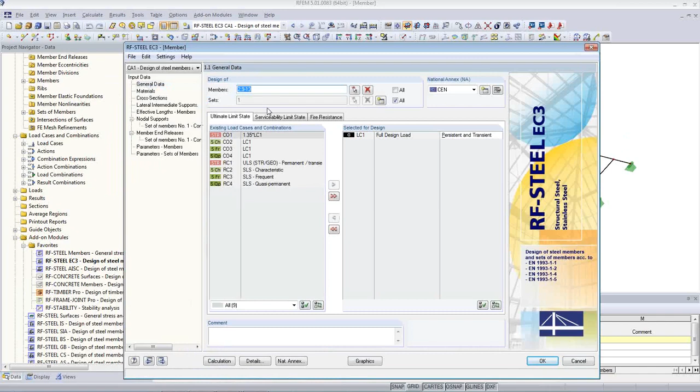Because we use the general method by default for sets of members, and in the general method Eurocode says it can be for any support condition. So we have the option here to set the support, the rotation of the support, the lateral support individually. We can also set the warping restraint and eccentricity.

By default we model a fork support. So now we have one case with individual members with fork support, and one case with set of member with fork support. We run the analysis and get the maximum utilization ratio just above 1.

If I look at the graphics, I see here, because we have a longer free length for lateral torsional buckling, stability is a problem. Here we have relatively low design ratios.

So I can check cross-section versus stability. Stability is the problem here. Cross-section would be okay, but stability is the problem.

So I'll go back to the module and change this. Now I model the fork support also at the other nodes here, which will then be similar to what we see on the left side. I click OK, and by default it sets up fork support.

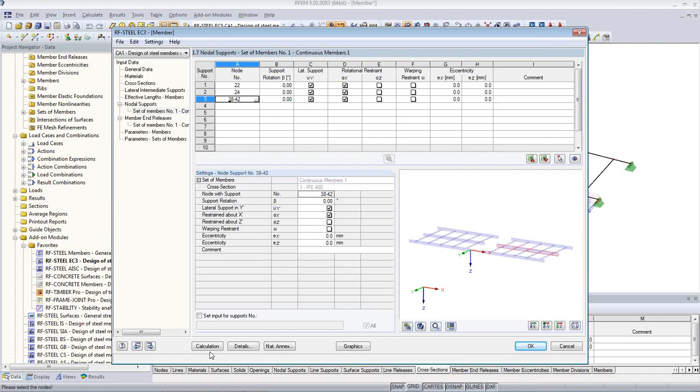Now we have local uY' and local φX' support. We run the calculation again, and the result should be more or less similar. We already have only 32%, and we see it's pretty much the same problem. So it is vital what kind of support condition you have, whether you do a set of member design or an individual member design.

Okay, let me see if there are some more questions that I can answer.

One question was about templates - is the program integrated with model templates, for example multi-beams? Templates, there are several templates we can talk about.

You can have a template which can be used as a block manager. So we have a set of parameterized structures that can be loaded into the same model. It comes with the block manager, which already has a large number of structures that can be loaded inside RFEM.

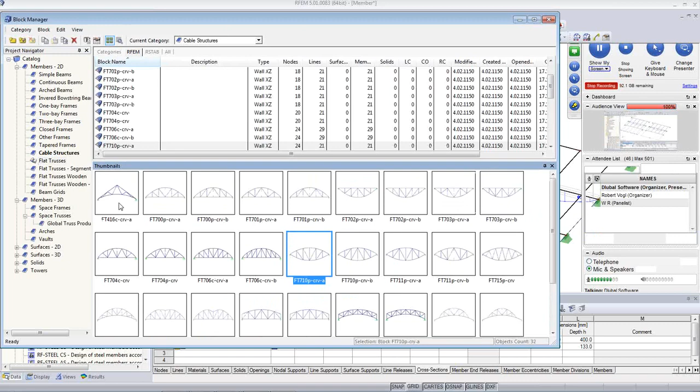There are all kinds - one-bay frames, arched beams, what we have here, three-bay frames, flat trusses. We have many of these trusses we can use, and those trusses are all parametric. So if I open it...

I'll have a parametric representation, and I can change the height or the width or other parameters, radius for example, or some parameters depending on each other. So things can be done with parametric input.

Once you have this, you can add this structure to an existing model. So this is one template that we have. This would need another half hour to explain, I think.

Then we have templates that we can load in, as I showed at the beginning, in the general parameters - actually you cannot edit it, that's why it's missing here. But if I create a new structure, you can open a template.

You can set up your model with all the cross sections, all the combinations, load cases, materials, and so on. Save it as a template via File, Save as Template. Once you have this template, you can select it when you open the next model as a template.

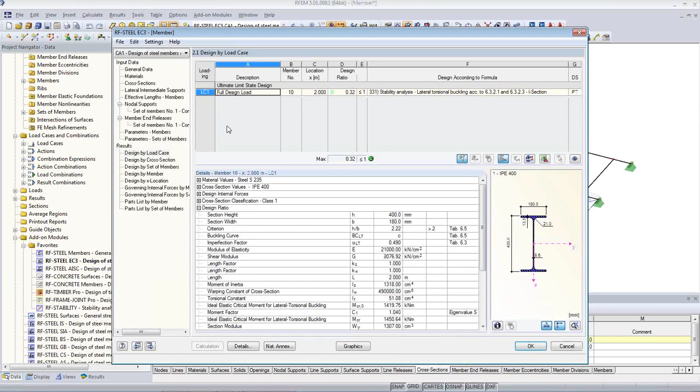One question was about where is the load application. In the Eurocode module, in the details, actually under stability, you can select load application of positive transverse loads. So if you have a transverse load, it will always be applied on the cross-section edge directed to the shear center. It's the destabilizing effect in the shear center, or it can be on the bottom, so it will be stabilizing. By default, we use the most unfavorable location along the cross-section.

Somebody asked, is it possible to do only an elastic design? Because in some cases I only want to do an elastic design and not a plastic design, especially if you have to deal with fatigue design situations. Yes, I think it's possible. Under ultimate limit state options, there's elastic design also for class 1 and class 2. When we have class 3, we automatically go to an elastic design. If we go to class 1 or 2, the software will choose by default a plastic design, which is more economic. But if you can't use it, you can select elastic design also for class 1 and class 2, and it will never use the plastic reserves.

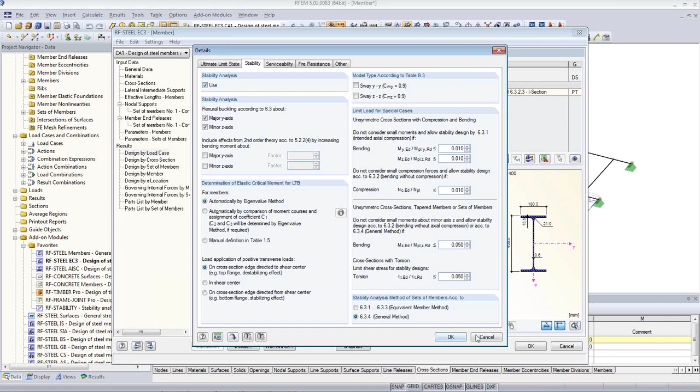Okay, I think we learned a lot today about RF Steel EC3 and RFEM. At the end, I'd like to go back to the presentation and point out a few more things.

You find a lot of information on our website, www.dlubal.com, including videos, newsletters, and the Dlubal blog. You can also find download options for test and trial versions. If you go to download, you can download your trial version of RFEM for free. It runs for 30 days, and you can do all the calculations without limitations with all modules. Only in the printout report there is a watermark.

I recommend taking a look at the page Help for Beginners. If you open this one, you will find introductory examples and tutorials for RSTAB and RFEM. RSTAB works the same way as we just saw in RFEM, but the limitation is it's only for frameworks. In RFEM we can add on, if you want to, also slabs, volumes, and surfaces. So in general, RSTAB is the smaller brother of RFEM, and works the same way.